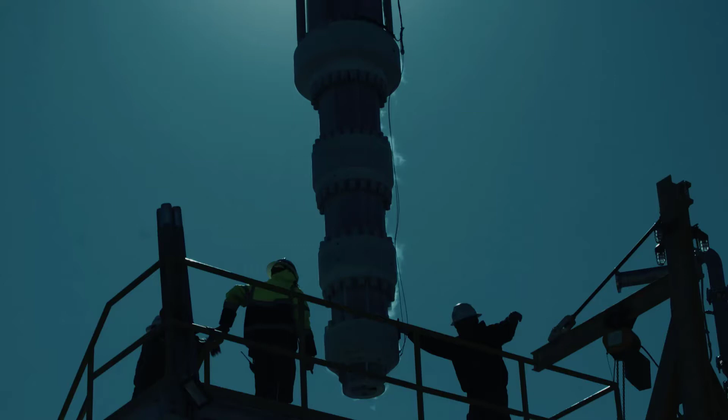Since the Institute's foundation in 1953, we at NIKKISO have solved various social challenges and created many products which did not originally exist in Japan.

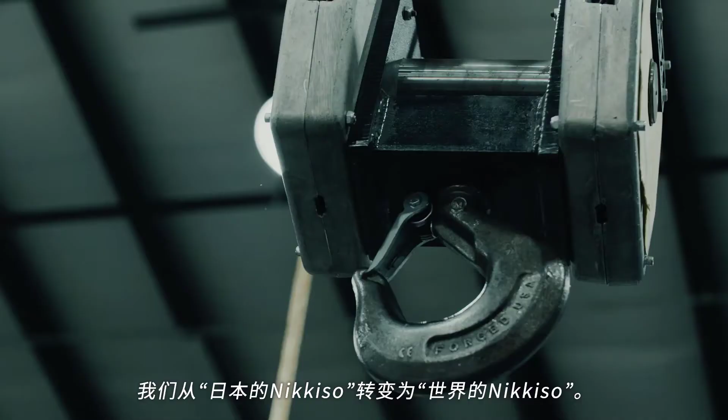NIKKISO currently operates in 3 business units: industrial, medical, and aerospace. As a result of expanding our business to overseas markets, NIKKISO of Japan has transformed into the NIKKISO of the world. At this very moment, somewhere in the world, we are taking on the challenge of new possibilities.

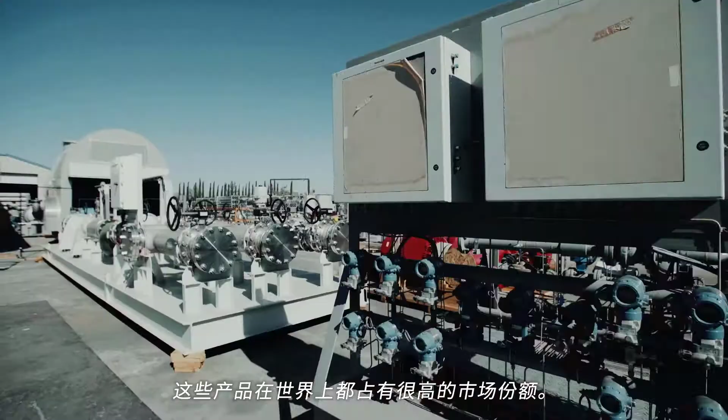NIKKISO manufactures pumps and systems with high market shares in the world, which are utilized for oil and gas wells, LNG transportation, power plants, and petrochemical plants.

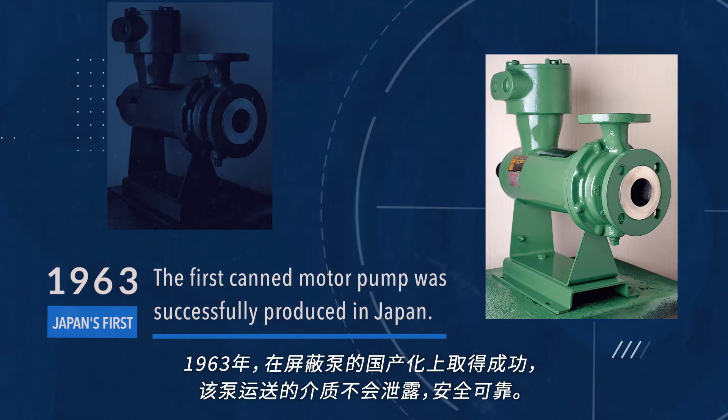NIKKISO pumps contributed to the stable operation of power plants. In 1963, canned motor pumps that handled liquids without leaks were successfully produced in Japan. Canned motor pumps continue to contribute to the safe operation of the petrochemical industry.

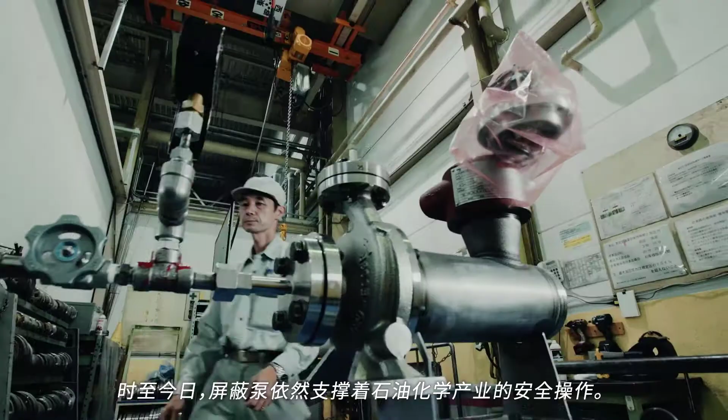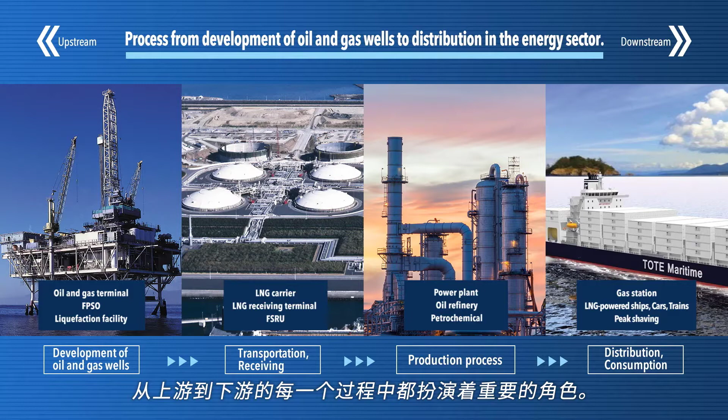In the energy sector, NIKKISO currently provides specialized pumps and systems. These play an important role in each process from upstream to downstream. Reciprocating pumps and systems are used at oil and gas wells.

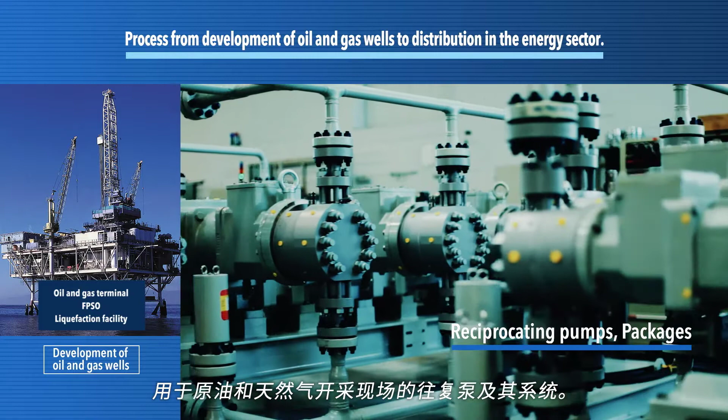Cryogenic pumps are used at LNG receiving terminals. Canned motor pumps and vaporizers are used in power plants and petrochemical plants. Pumps are used in gas stations and LNG-powered ships.

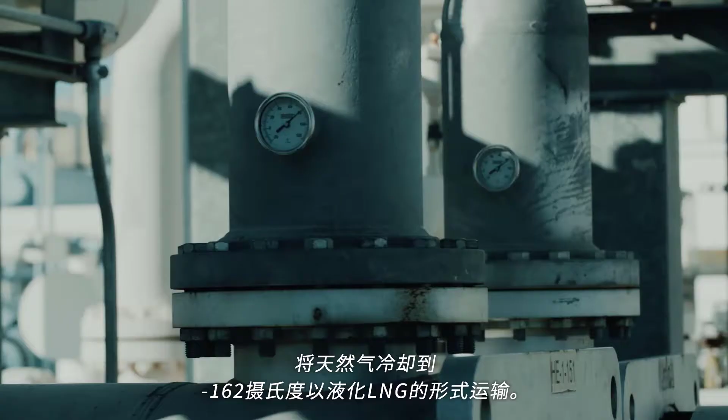Due to increased environmental awareness, the world's energy demand is shifting towards natural gas, which generates less CO2 emissions than coal and oil when combusting. Natural gas is transported as liquefied natural gas at -162 degrees Celsius. A cryogenic pump is used to transport LNG.

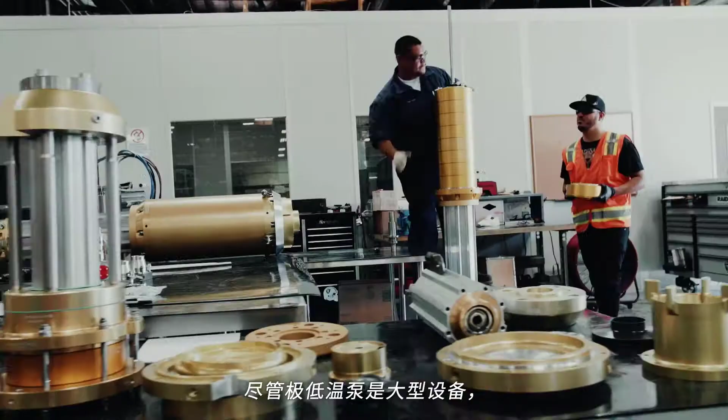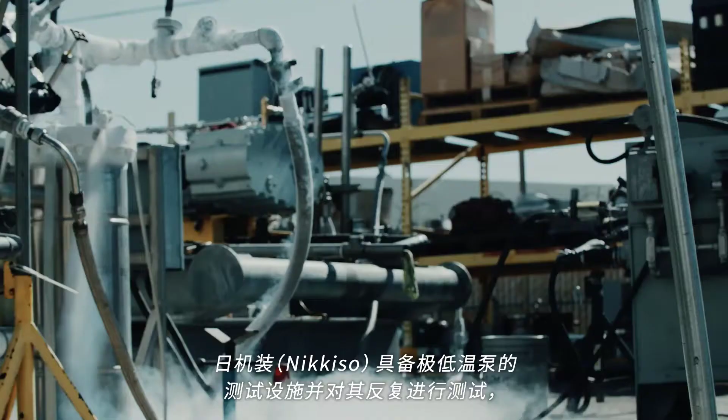Although the cryogenic pump is massive, high-quality technology comparable to precision machinery is required to operate metals with different heat shrinkage rates in cryogenic liquids. At NIKKISO, we have testing facilities for cryogenic pumps, and through repeated testing, we deliver safe and stable products.

You take, for instance, natural gas in a gaseous form, you liquefy it, you transport it to a remote location where you regasify it or use it for fuel. This whole chain is called a virtual pipeline.

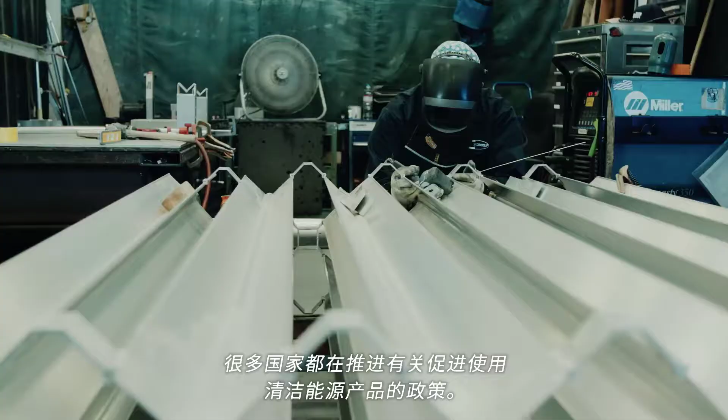If you look into the virtual pipeline, the world is hungry for energy. There are many countries that have set policies going forward to provide their society and their people with clean energy products, and that is something that we can offer.

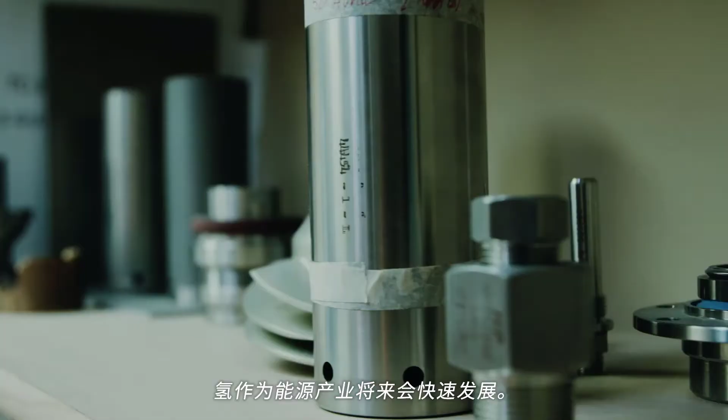Another area is hydrogen. Hydrogen is going to become a very big energy industry. Our products will help to make hydrogen liquid, to transport it from one place to another, and also make it available for a bigger group of people.

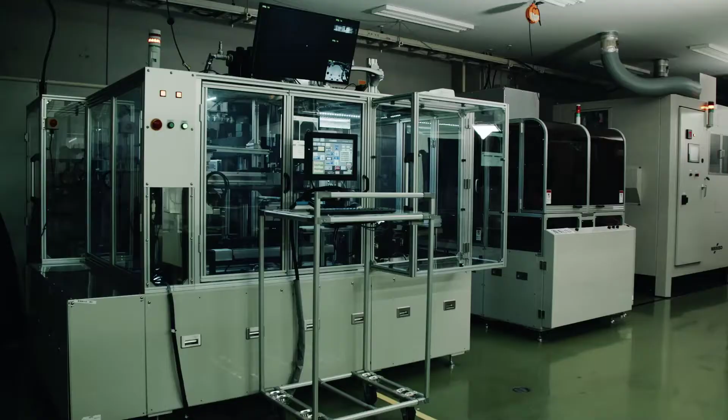Aside from pumps and systems, NIKKISO also produces manufacturing equipment for electronic devices.

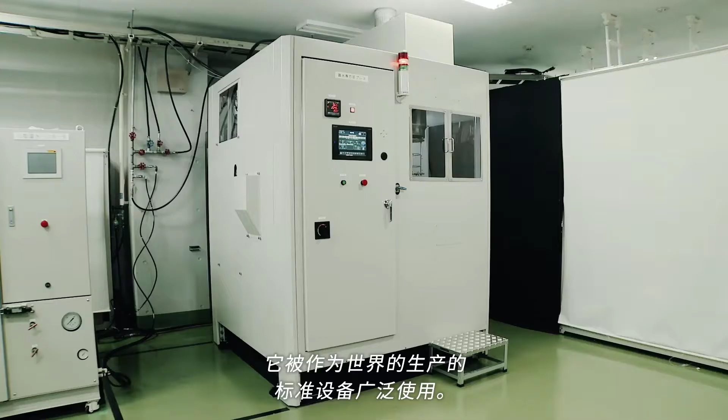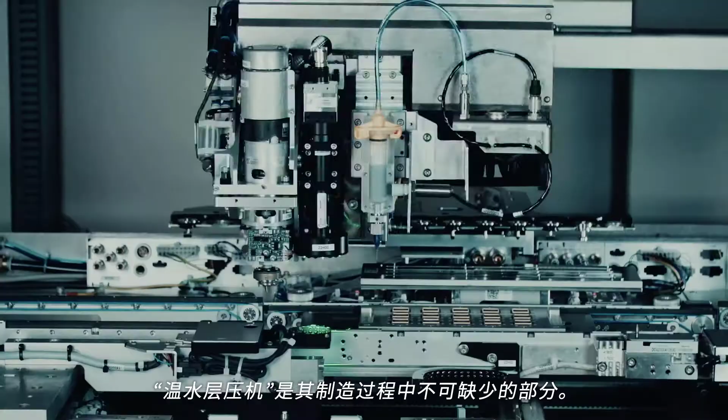Electronic devices, such as smartphones and computers, are essential within modern society. The warm isostatic laminator is indispensable to its manufacturing process. In 1985, NIKKISO began manufacturing and selling warm isostatic laminators.

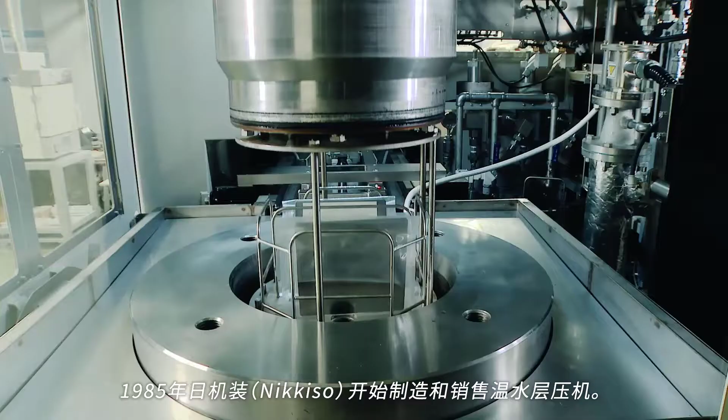This revolutionary product can apply uniform pressure and temperature using hot water, unlike mechanical presses that pressurize in the conventional uniaxial way.

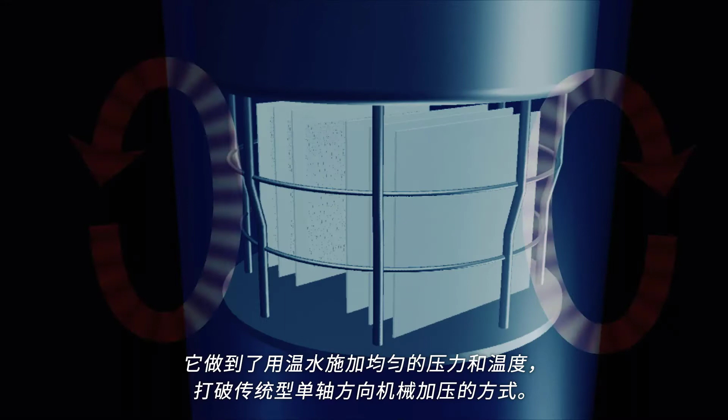The practical use of 5G will soon become a reality. With improved high-speed data, communication will bring big changes to many industries.

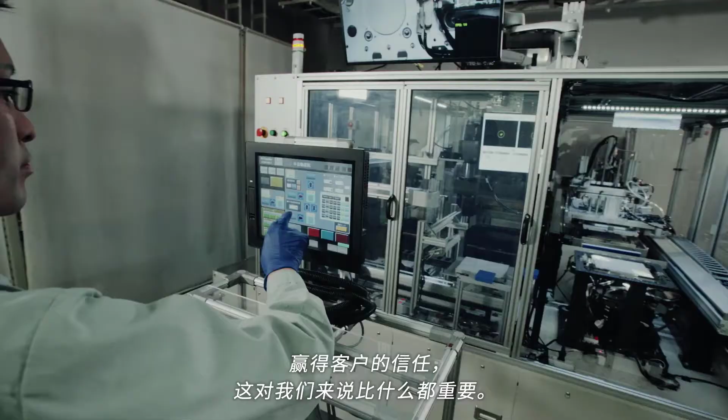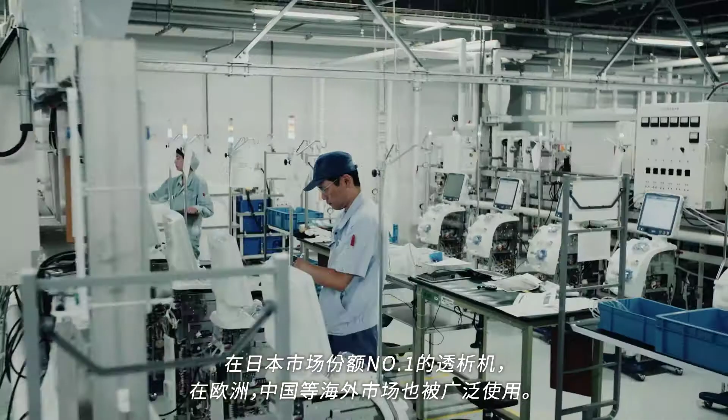Since developing Japan's first domestic production of dialysis machines used to treat chronic renal failure, NIKKISO has been a leader in dialysis medical therapy in Japan. The dialysis machine has spread overseas to regions such as Europe and China.

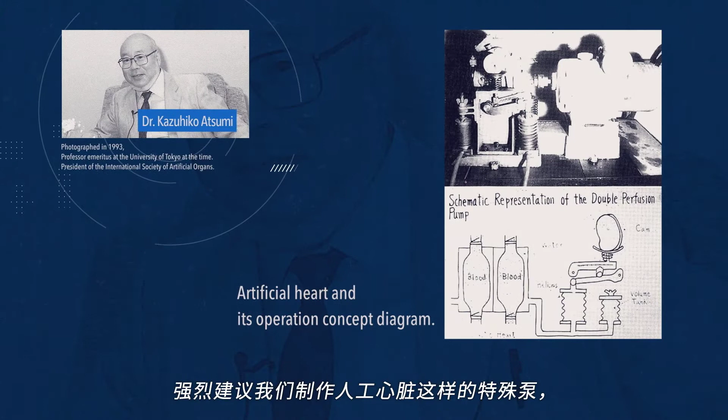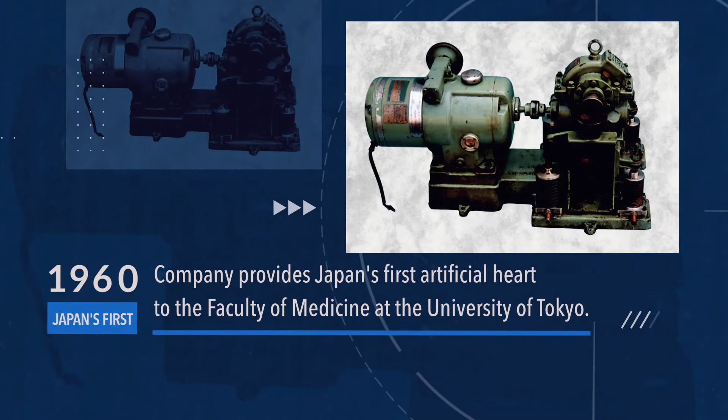In July 1960, the first artificial heart prototype was completed. Later, NIKKISO decided to launch a medical division.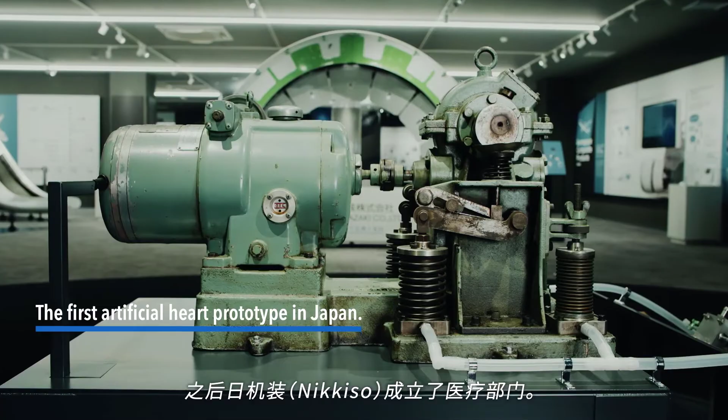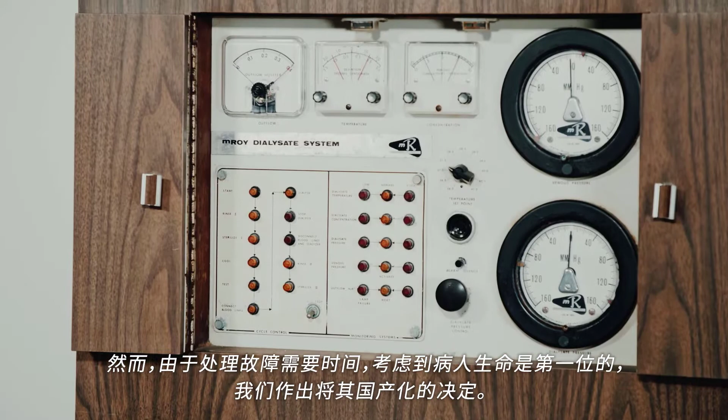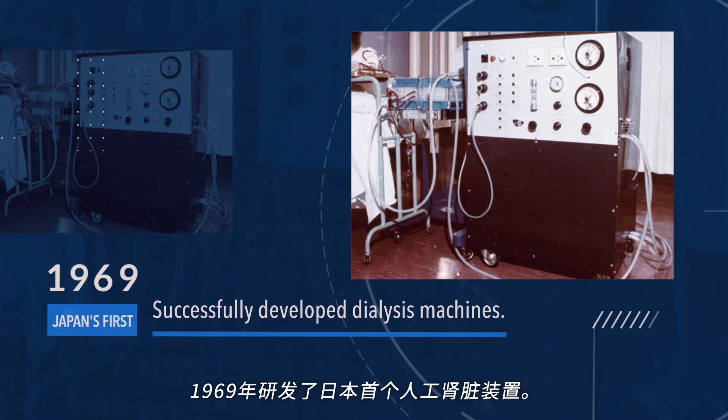In the mid-1960s, NIKKISO imported and distributed dialysis machines manufactured by Milton Roy Company. However, since support for repairing failures took time, NIKKISO decided to produce machines in Japan, putting the patient's life first. In 1969, NIKKISO developed Japan's first dialysis machine.

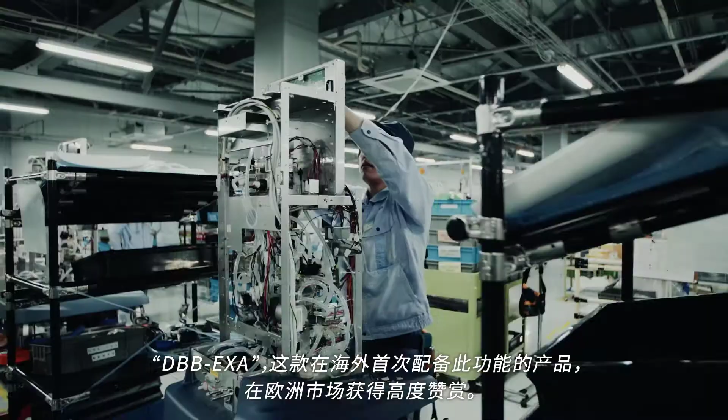DBB EXA, the product equipped with this feature for the first time overseas, is highly regarded in the European market. As a result, NIKKISO is beginning to be recognized as an innovative company in the overseas market.

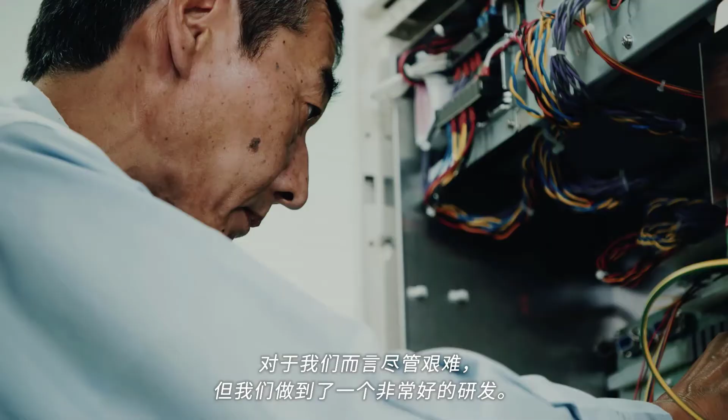NIKKISO has also expanded into fields other than dialysis. Our business continues to expand with products such as the only artificial pancreas in the world, the first microwave surgical instrument, and more.

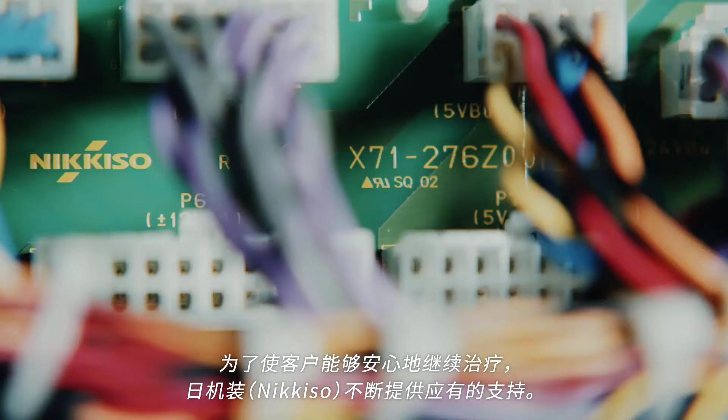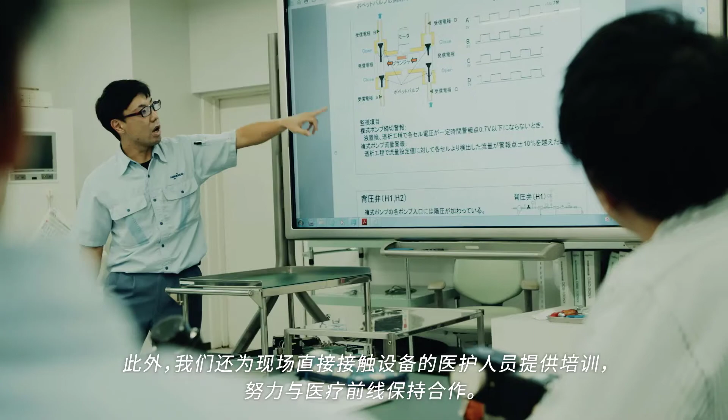The medical equipment business does not end with the sale. In order for customers to continue therapy without worries, NIKKISO provides continued support. NIKKISO tries to quickly satisfy customer needs by integrating a total value chain from design and development to manufacturing, sales, and services. In addition, we provide training for medical professionals who handle the equipment on site. This allows us to collaborate with the medical community.

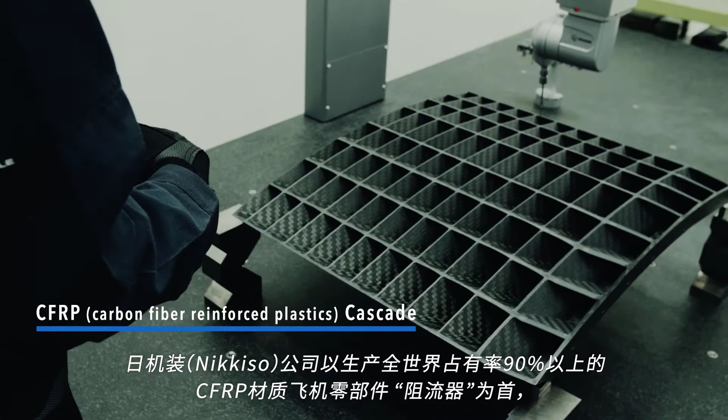NIKKISO is producing various aircraft components made from CFRP composites, including Cascade, which has a global market share of over 90%.

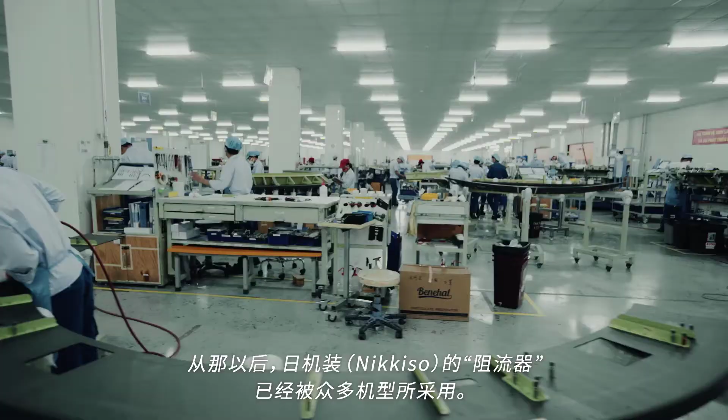Since then, NIKKISO's cascade has been adopted by almost all commercial aircraft. In recent years, we have begun working on various other aircraft parts, such as engine nacelle parts and main wing parts.

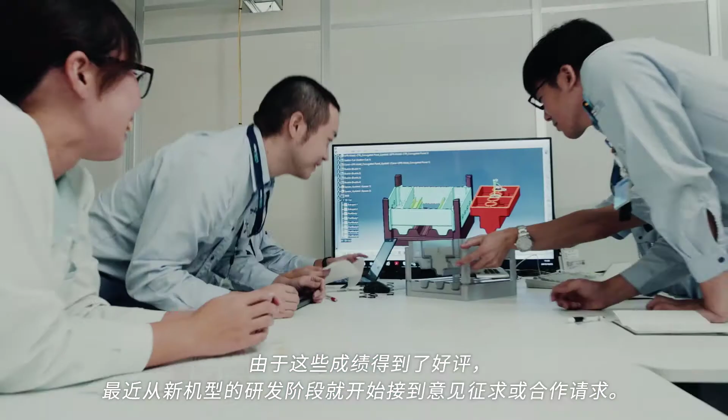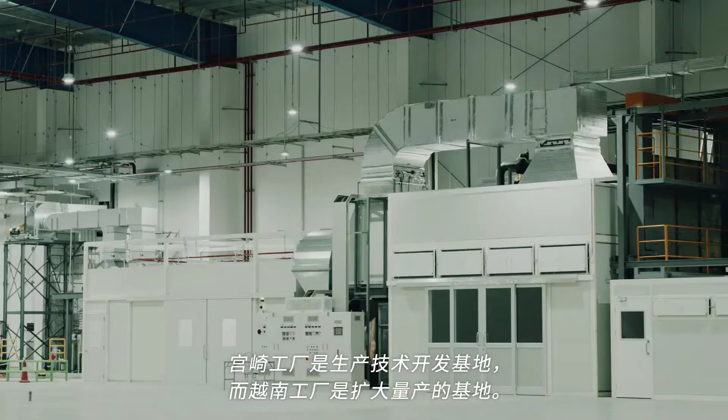The Miyazaki factory is positioned as a production technology development center, and the Vietnam factory is positioned as an expansion base for mass production. NIKKISO will respond to future demand with both factories.

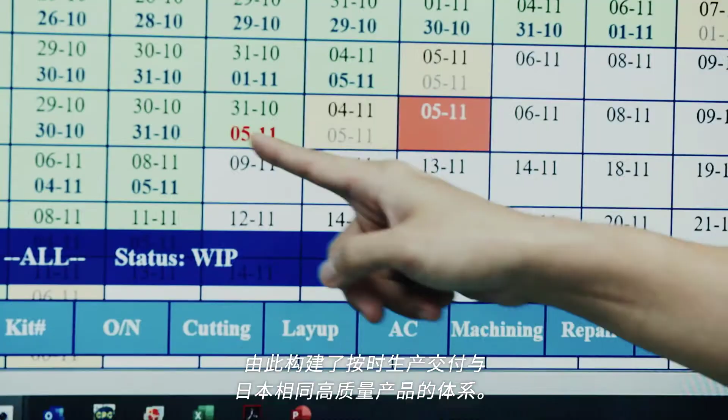Our performance and strategy has been recognized, and we have received numerous awards, including Supplier of the Year.

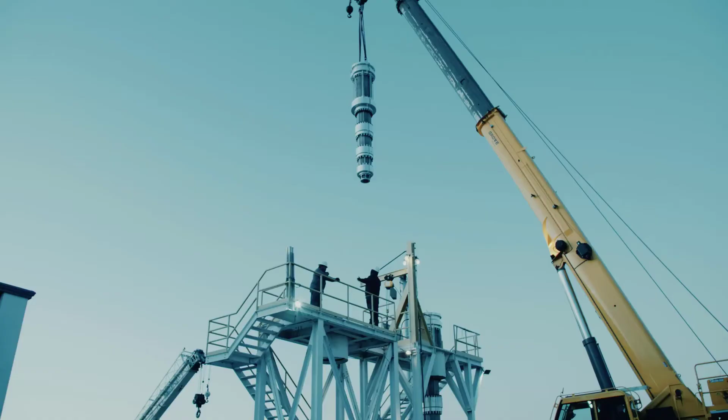By challenging the unchallenged, NIKKISO has developed new markets and many of Japan's first and the world's first products.

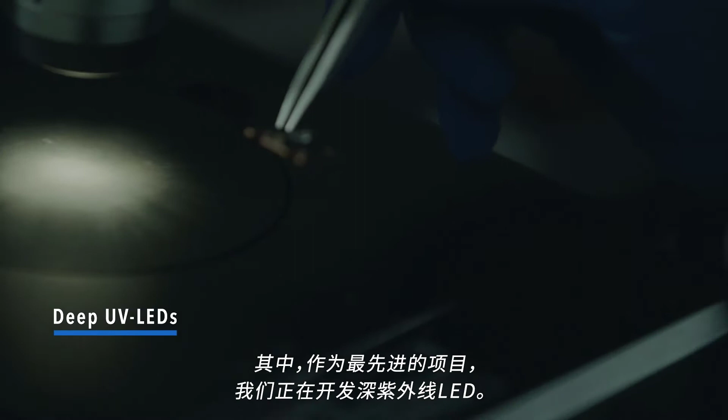As the most advanced project, we are developing deep UV LEDs. Deep UV has the efficacy to detoxify bacteria in the water, air, and for UV curing. Deep UV LEDs are expected to be a new era technology.

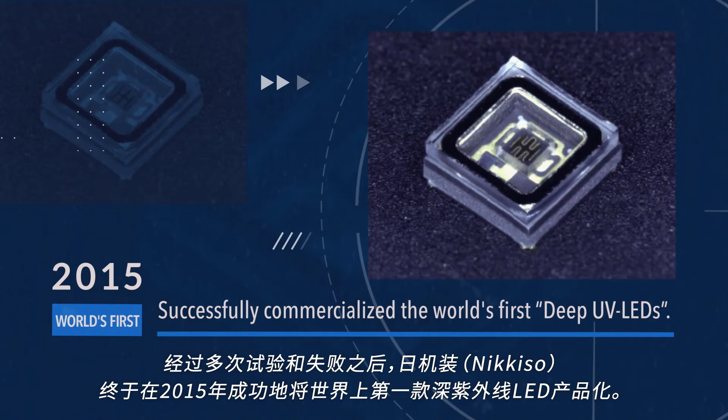Professor Amano, who received the Nobel Prize in Physics for blue LEDs, was researching deep UV LEDs with NIKKISO when he received the Nobel Prize. After much trial and error, in 2015, NIKKISO was finally able to successfully commercialize the world's first deep UV LEDs.

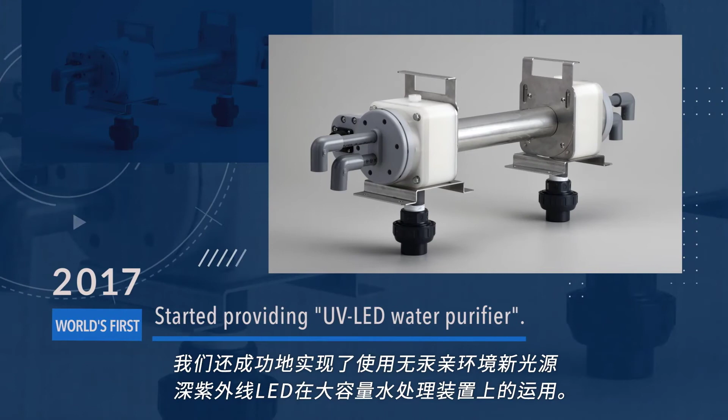NIKKISO has also succeeded in commercializing large-capacity water treatment equipment using deep UV LEDs as a new environmentally friendly light source which does not use mercury.

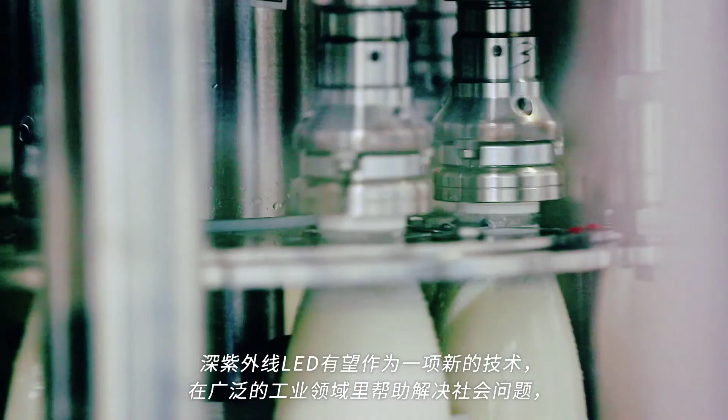The usage of deep UV LEDs does not stop there. We have already developed air purifiers, an ozonated water hand washer, and water purifiers. Deep UV LEDs are expected to be a new technology that will help solve social issues within a wide range of industrial fields, such as environmental hygiene and medical care industries.

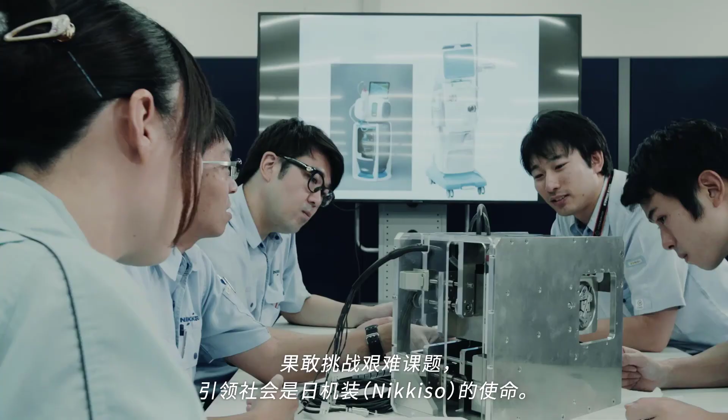Over the border, NIKKISO actively takes on challenges and demonstrates leadership in society. In the future, we will continue contributing to society with the power of technology as the NIKKISO of the world.